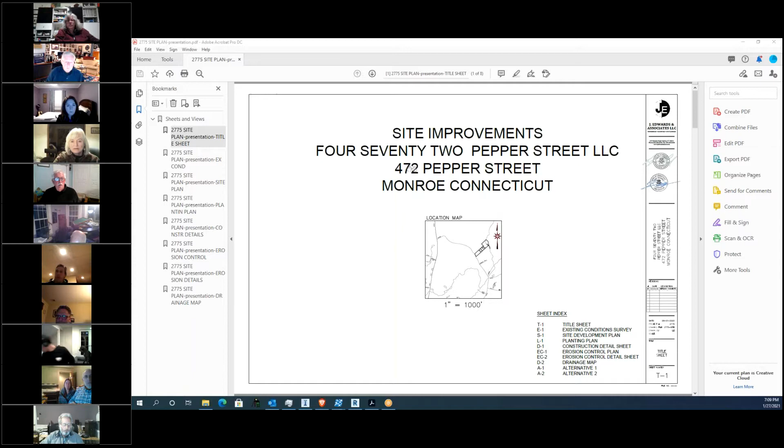Jason Edwards, is everyone able to see that? I can see it, okay. Jay, you want to go to the first sheet? There are the existing conditions. Can we get that bigger on there?

Okay, basically this site consists of an approximately 10.1 acre parcel. It presently has 3 buildings on the site. The 2 rear properties were built back in the early 70s, and the building closest to the road, which would be to the left of the drawing, was built sometime in the early 80s.

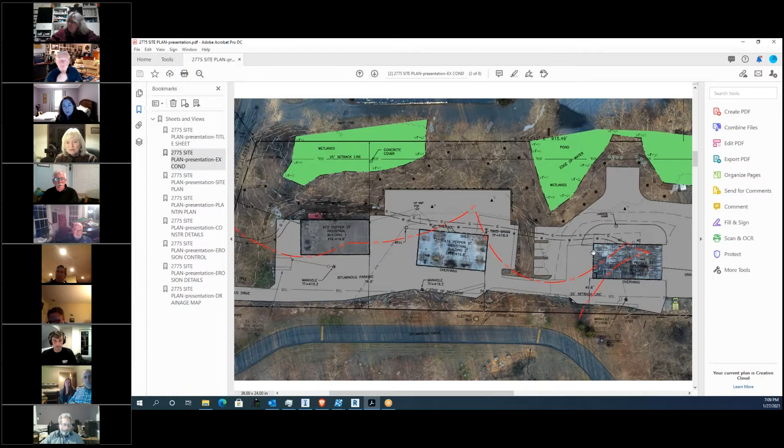What we are looking to do is expand the parking area so we can accommodate additional parking and expansion of the uses of the existing tenants in the building, primarily areas for truck and equipment parking, one being the building in the rear being a landscape contractor which would have small construction equipment, and areas for storage of materials, with other outside storage in storage containers.

We have basically gone through and prepared the plans. We've done soils testing to verify suitable areas for septic system expansion. Each of the buildings has an existing system.

And that's all been done under the supervision of the health department, and also with some testing to verify suitable areas for stormwater collection of the parking area.

Right now, the existing parking area is paved, but there is no central or controlled drainage for the site. Back in 1972 when they were built, they just basically sheet flowed it off to wherever it went.

With our expansion of the parking area, we are also going to construct 3 water quality basins, one basically for each of the 3 buildings.

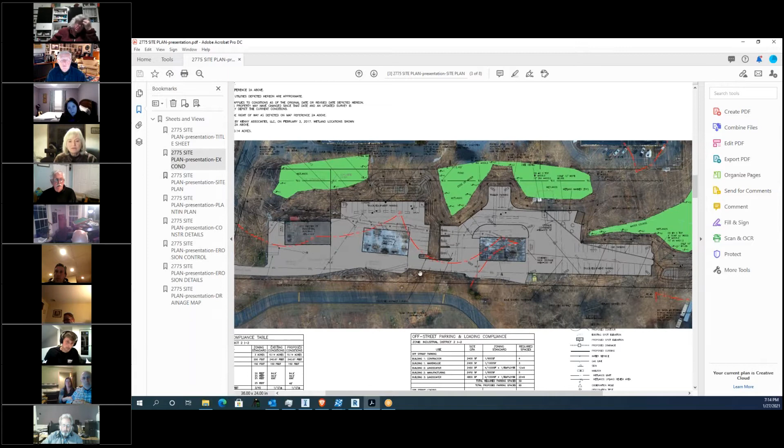There's basically three wetlands systems on the site. One which is immediately to the front of the property along Pepper Street, behind building number 1. And the other two, one being behind building number 3, is an existing wetland system. And the third one is to the rear of the property, and that discharges off to the north.

The activities, basically, we are indicating them in our application as activity number 1, which is associated with the first building, and that involves the construction of the rain garden. There won't be any alteration to the wetlands themselves. We will be doing work within a regulated area, but there will be no disturbance within the actual wetland limits.

Activity 1 will disturb approximately 2,480 square feet, for the construction of the rain garden. That will require approximately 85 yards of fill to construct that garden.

The second activity is the construction of the truck and trailer parking area to the rear of building number 2, and the construction of the stormwater basin, which is going to be associated with that.

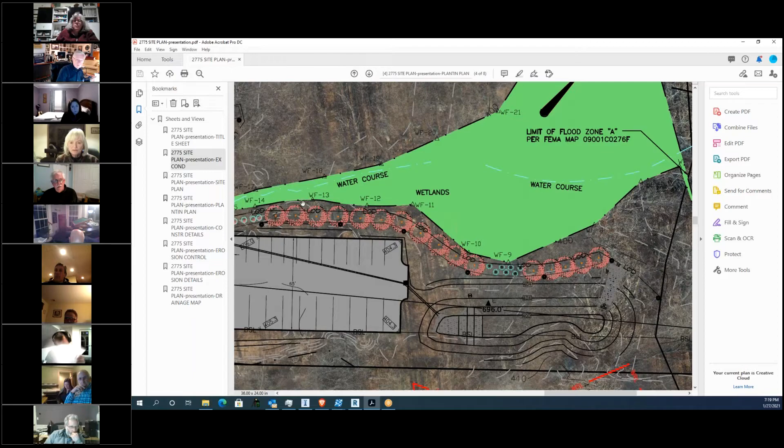We have provided some mitigation for the project to help alleviate some of the disturbance we're doing within the upland review area. This includes a planted buffer along all the edges where activity comes within close proximity of the wetlands, which is included in the design package provided to you. We are also proposing to install wetland markers along the edge of that buffer to delineate the limits of the wetlands and the restrictions established by the town for placing of those markers.

The third thing is a little more indirect, but I think is as much of a factor: right now all of the runoff from this site is untreated. We are providing an upgrade to the stormwater system and created a plan that will treat the runoff in accordance with the stormwater management manual. We feel that is a help in mitigation from the existing conditions on the site.

We have provided two alternatives to you that we prepared in coming to the issue we're now proposing. Get those up there, Jay. Everybody see alternative one? No, this isn't an alternative. Oh, I guess it is. Okay, I'm sorry, can you bring that up, Jay? I didn't realize I can't. Okay, now it makes sense.

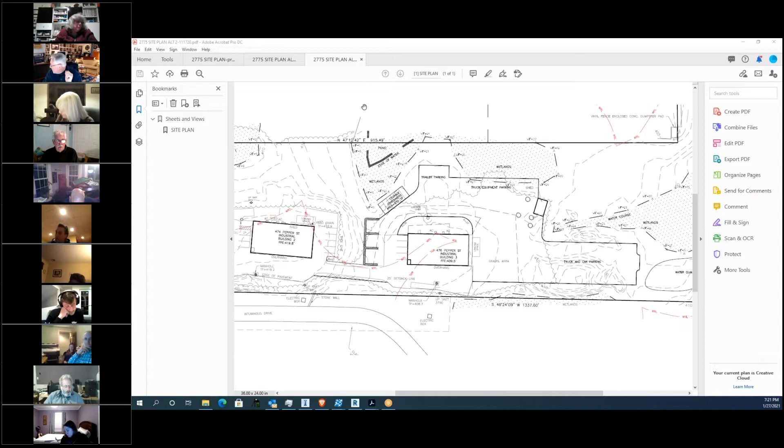Even though we do have a fair amount of activity within the regulated area, we've been able to construct and position the proposed improvements and expansion within the upland review area and maintain separation to the wetlands. With the mitigation of the buffer plantings we're proposing, this is by far the best of the alternatives. We feel this is a good plan for meeting the requirements of the owner and tenants on the site while still maintaining a reasonable separation to the wetlands and the best overall proposal for the site.

Again, the areas closest to the wetlands in most cases are the stormwater basins. Those will also provide a certain amount of protection because nobody's going to be able to go in there besides to maintain them. There'll be no reason for anybody to be back in those areas of the site. So that's basically my proposal and our proposal, and we'd be happy to take any questions from the commission.

Okay, start with Commissioner Spence. No, or wait till the end? Okay, start with Commissioner Gingras then. No questions. Commissioner Massaraco? No questions.

Commissioner Hall: Yes, how much additional asphalt will be put in place here? Can you give me an idea how many yards potentially?

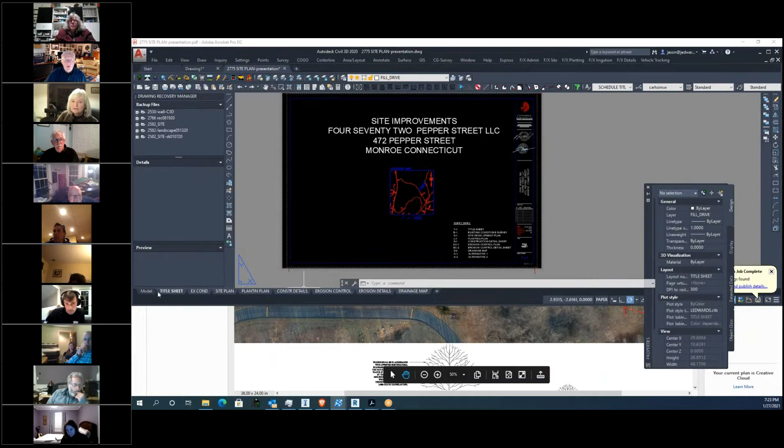Yeah, if you want to go on, I'll get that material for you as I'm talking. I've got to pull it up, it's right on this list here. Everybody gets the... sounds like somebody has that. Oh, do you want me to wait for that or should I go on? From my standpoint, why don't you go on? I'm just going to look it up and see what the difference is. Okay, just give me a minute.

You mentioned three different amounts of fill to be put in. Can you recap those quickly?

There's basically 3 areas of filling associated with this project. The first one is the stormwater quality basin located to the front of the building. That was approximately 85 yards, and that was basically constructing the berm for the basin.

The second activity, really the primary amount of total filling on this site, is for the expansion of that parking. It drops off to the rear of the existing building, and we have to bring that up to grade, which will require approximately 500 cubic yards of material to be brought in.

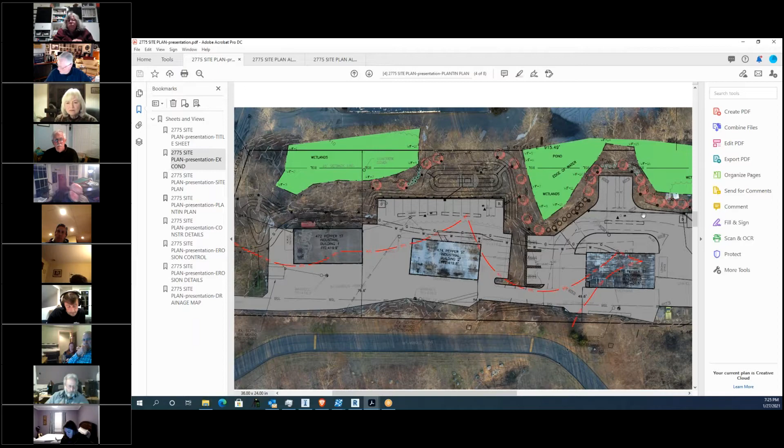The third area is associated with the construction of this parking area here. There's a little bit of filling required for the trailer parking in the back of the building, but the majority of the filling is to construct this new parking area to the northeast of the site, requiring approximately 925 yards. So those are the 3 areas, and that's going to be basically clean common fill, plus whatever gravel material is needed for the road base and pavement, all included in that number.

So it's going to be a mix of materials, but primarily common fill for grading out the parking areas.

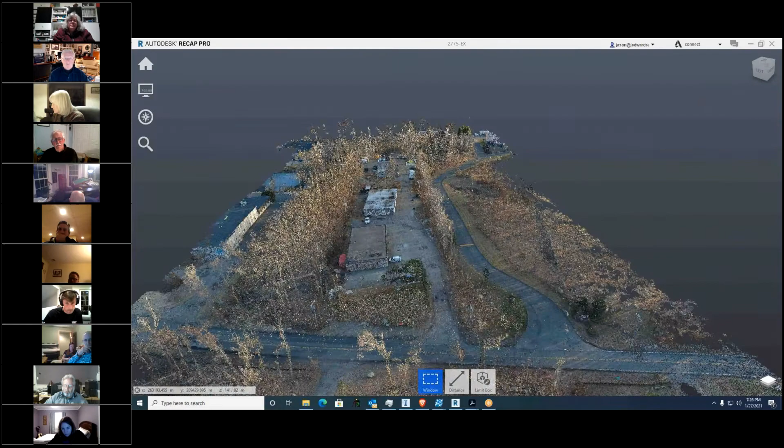Are you taking out any trees for that back section? Yeah, the water quality basin, or rain garden, isn't going to take anything, but the other areas we're expanding are all basically wooded. Here's an aerial view so you get an idea. We're in the back building, the third. Looking straight out behind those cars is where the larger parking lot for activity number 3 is going to go. There is a pile of fill that's there which we're going to use, and that's included in that 900 and some odd yards, but overall we will need 925 yards for that.

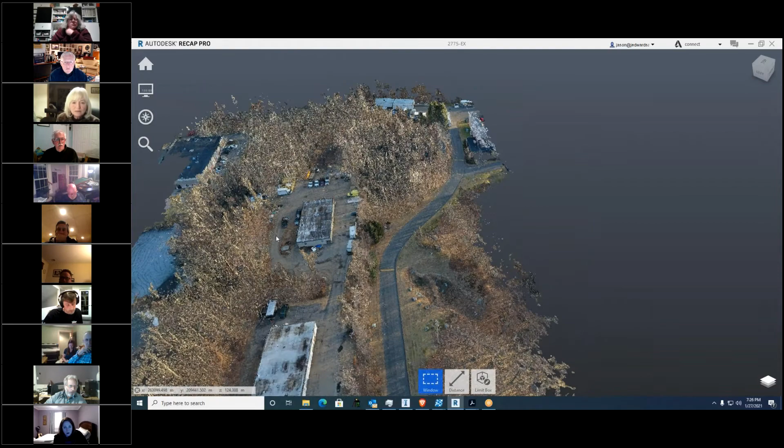The other area is again right behind building number 3, which is a wooded area, and likewise the back of building number 2 is a wooded area. So all 3 of them are going to be wooded, meaning there are going to be some trees removed as part of the construction.

Okay, and if I could get the asphalt yardage, that completes my questions. I'll get that for you in a second. Back to you, Chairman Romano.

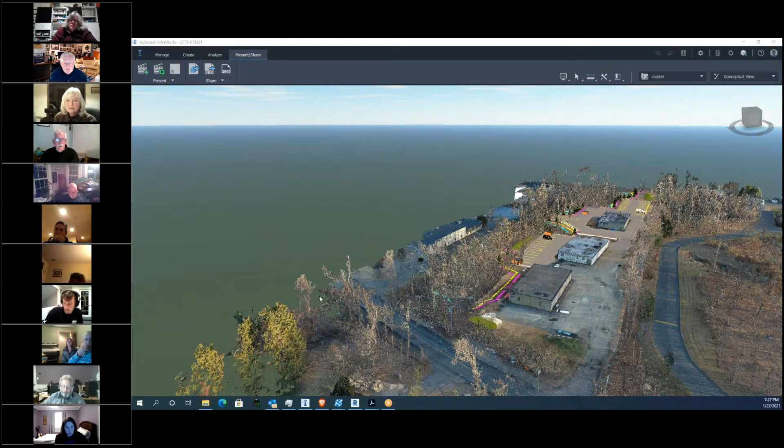Thank you, Commissioner Hall. Now, are the uses on this property going to change, or is it just to build on what's happening now? It's basically an expansion of the uses that are there now. John Kimball is also on, he may be able to explain a little more, but from what I'm gathering, the tenants that are in there now are the ones looking to expand.

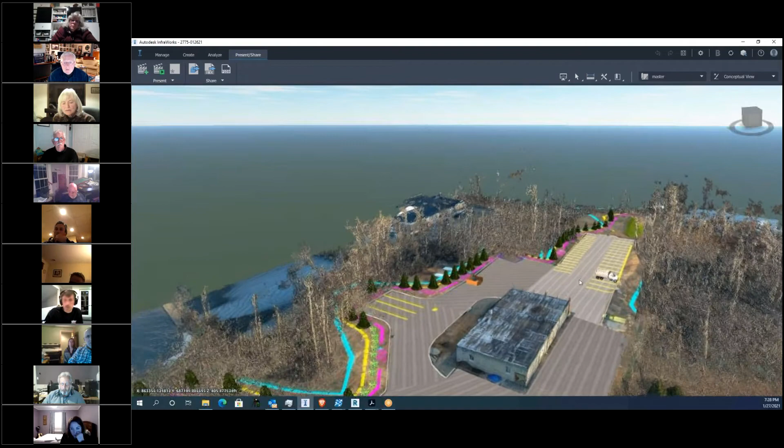Okay, and I'm trying to figure out how to phrase this question. Are there any other variances being asked for on this property for this project, or is it all just straight regulated stuff? It's basically regulated, all approved uses. The only thing we're doing, we have to go for a special exception or site plan, but we have to go before the zoning commission for approval.

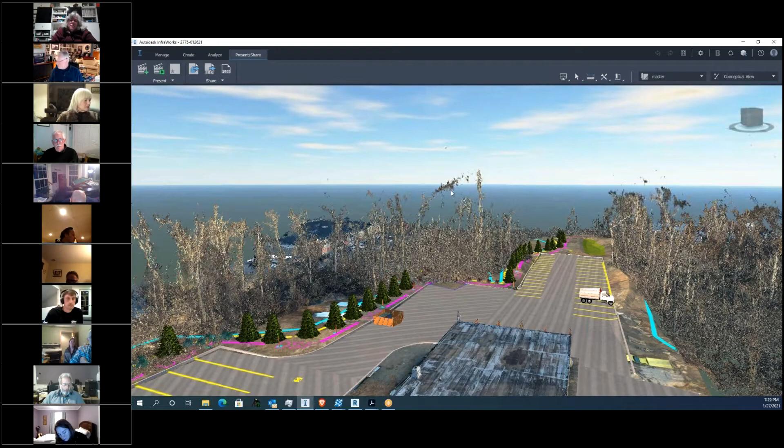The arborvitae on the plant list, why was that chosen? I wasn't the one that chose that, and I'm not going to claim to be an expert in that area, so we'll have to get back to you on that. It was a choice of one of the tenants in that building who prepared that landscape plan. That's his business, and he's the one who chose that.

And then the last thing, about the outside storage bins, what is the potential product that would be in there? It's going to be mulch chips, mulching materials, maybe sand and gravel—the typical things a landscaper uses when going to a site to install a pool or whatever. So it's not going to be a retail situation, it's for his own use.

I understand, I was just curious what was going to be stored in the bins, because I recall a similar application a couple years back in the same part of town where the storage bins had to be covered. I'm just wondering if that applies here too, but that wasn't from us, right? Does anybody remember?

Or was that the planning and zoning? Wasn't that salt or something they were going to be keeping? I'm talking about the indoor rock processing facility. I thought they had to be covered. But anyways, I was just curious to know if that was in play here. But that was it.

I would like to know why arborvitae. I'm not even sure if it's on the list, but if it is, it just seems like an awkward idea to me. But that's all my questions. Go back to Commissioner Spence.

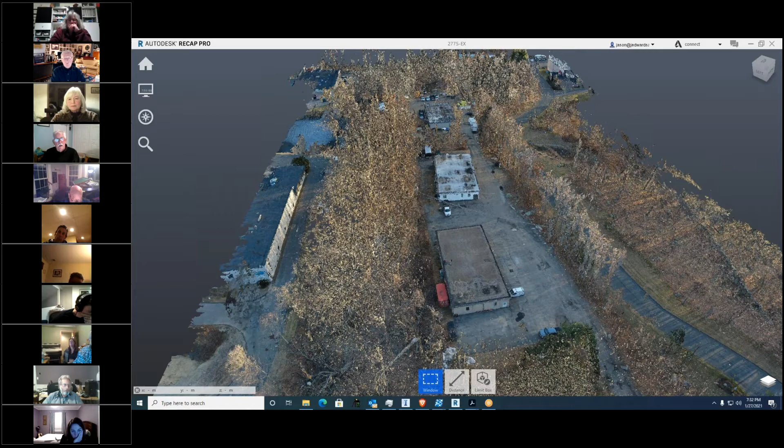Now, Mr. Edwards, I believe you said you didn't know what the source was from the piping, the culvert that goes underneath or behind building 3 and opens up into the intermittent waterway that starts, you don't know where that comes from? No, we honestly don't at this point. But if you look at the overall GIS maps, you'll see that there is a pocket of wetlands on this property here, to the south, and it's an isolated pocket of wetlands, and I'm not sure if that's possibly where it comes from. I don't know.

But it definitely has been there for a while, because if you go out there, there's rather large trees and everything else associated with it. That's just a place that looked like it would logically have come from at some time in the past. They piped it through there. I don't know, but there's no place we could find on our own site that there was a catch basin or any other source of drainage that would have resulted in and come out to that point.

Well, the culvert comes in from the west and flows to the east because there's a small head wall, so to speak, of large rocks that go around the culvert, holding it in place. So wouldn't you be concerned about hitting that if you didn't know where it was coming from? It seems to me construction might interfere with that somehow. I don't know, it just seemed to me that you should know where it is and where it's going before you start digging and moving earth around it and building on it. So that was just one comment that I had.

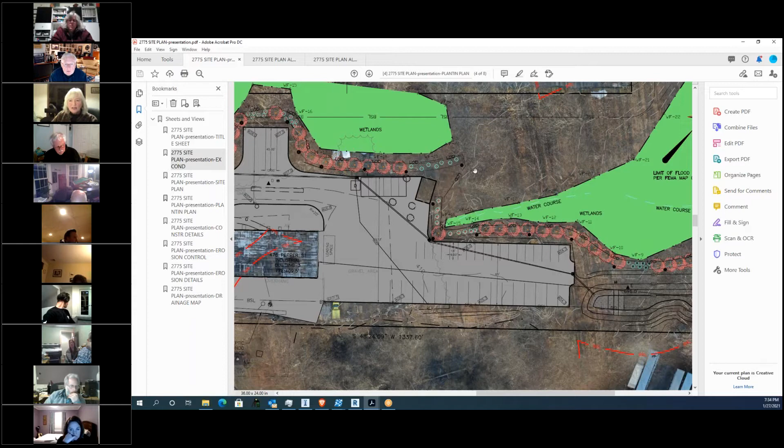And let me see. Oh, I really missed the bar scale on the plans, because our plans are not full size, and it's very hard to gauge how big a space is without having a bar scale. So I would appreciate seeing that on the plan. And I see that it's there. Never mind, I just found it. It was not what I was expecting it to be. So my apologies. Okay, let me see.

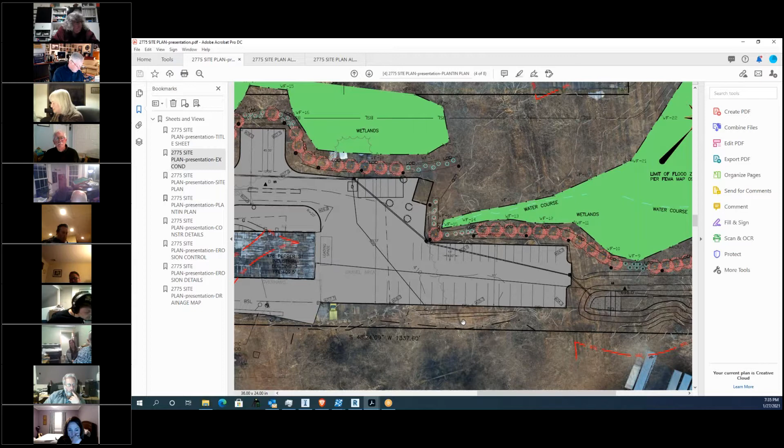Can you tell me what the slope is toward the bottom of the backs of all of the detention basins? It seems to have a very long slope, especially on the northern side. The northern side, they're both sloped at, most of the slopes we show here are at 2 to 1, which is the standard minimum. And there's nothing that's any steeper than that, because I guarantee the town engineer would have brought it up as a comment.

Understood. It just appeared to me that the last contour seemed to be considerably further away than the previous ones. And I was wondering if the LOD could be pulled away a little bit from the side of the wetlands, if that was as far away as it appeared. I'm concerned that you're so close to the wetlands in so many places that I can't see how it won't disturb it in some way or another.

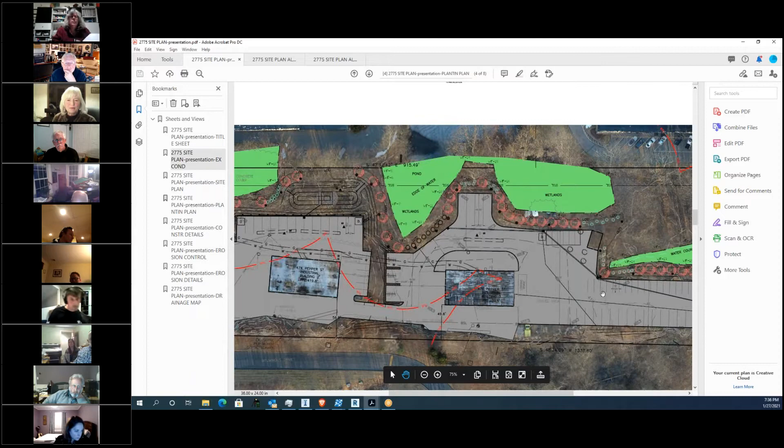Is there going to be any plan for an oil sand separator? You've got a ton of heavy machinery and other possibly polluting materials that are going to be funneled into the detention basins. But as was mentioned in Mr. Danger's report, this is a direct attachment to the Pequonnock River, which is right in the back and up to the side of the property. I was on the commission and committee for the PRI, and one of the things they were trying to discourage was too much development too close to the wetlands that directly contribute to the Pequonnock River. In this case, you're really accelerating development right next to that lead-in to those wetlands, and I'm a bit concerned about that.

Just tell me where I go. Oh, test pits. I see all kinds of test pit results, but I don't know where the test pits are. Can you show me where they are on the map? Because I could not find them.

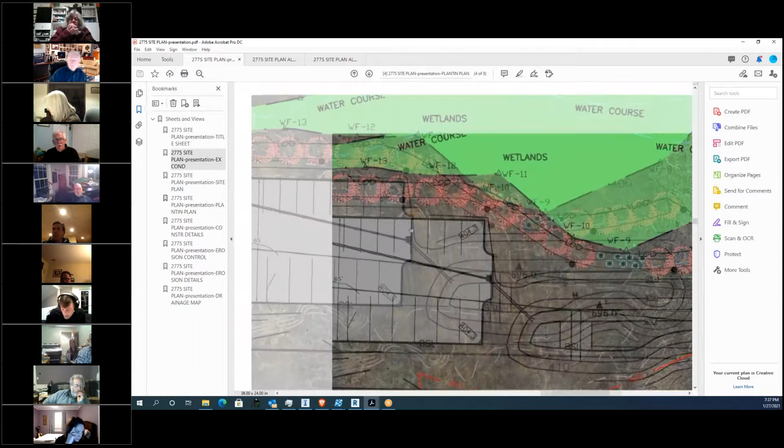He's showing you right there. You have two symbols: the triangle is your deep test, and the little circle colored in is the percolation test that was done. My little circle is about a micron. There's no way I could have found that.

Was there one done in the bottom of each of the detention basins? Yes. I take it back, I don't think there was one done for the rain garden in the front, because it's only a foot or two deep. But the major ones, basin number 2 and basin number 3, were both tested.

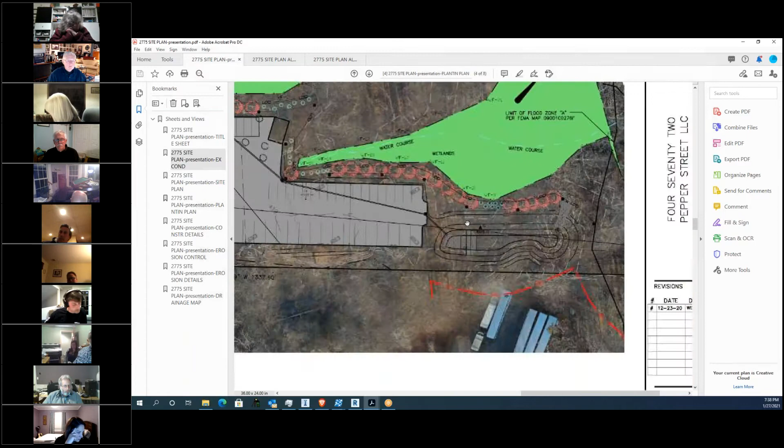In the bottom? Because I'm looking at sheet S1 and I'm not seeing any test pit in the bottom. I'm seeing it, I just said that. I said the first basin, which is the water quality basin to the front, we didn't do a test pit because it's only a matter of a foot or two deep. We didn't think it was necessary.

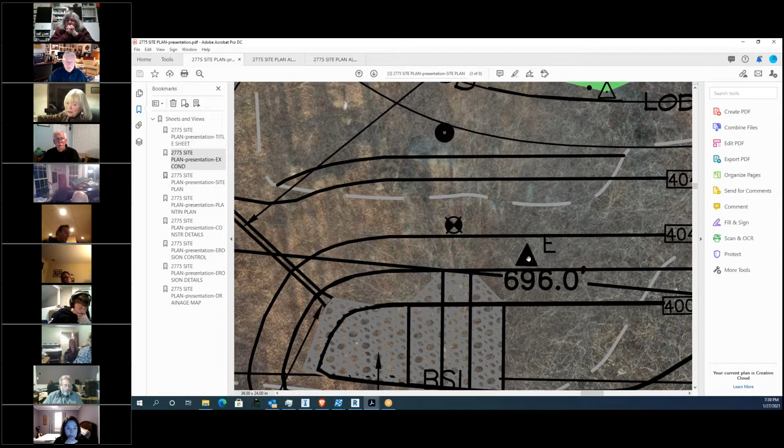No, I'm talking about the one on the far east side of the property. I do not see one in the bottom of that basin. Yeah, that's the one he just showed you, it's test hole number E. But that's 4 feet above the bottom. That's at elevation 404, 403, and the bottom of the basin's at 400. So that's a big difference. Yeah, the test pit's 8 feet deep. Okay.

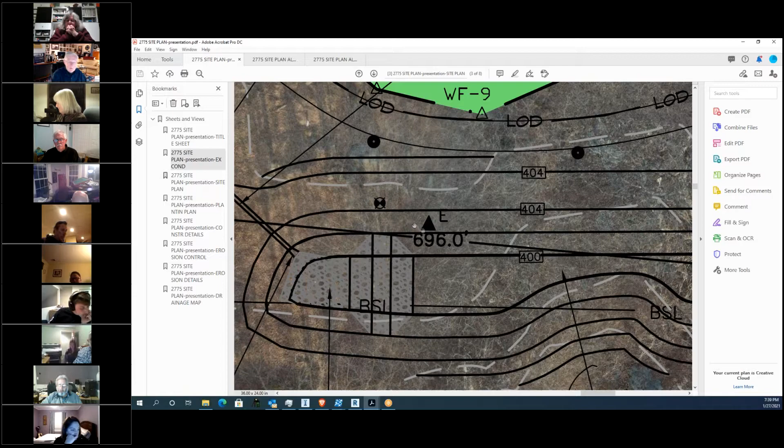All right, well, thank you. Now that I know where the test pits are, that does help a great deal. Okay, let's see.

On the rain garden, you have the limit of disturbance on the north side of the property. Where's the LOD on the south side? How far are you clearing to make that rain garden? You lost me there - it's just going to be a swale coming into the rain garden itself. We're not doing anything close to the wetlands. We put the limit of construction toward the wetland side.

Understood, that's not what I meant. On the north side, how many of the trees that are there now are going to remain? Is everything south of the red line going to remain, or is that going to be cleared? Oh, south, there's no reason for us to be over there, there will be nothing done over there. Okay, that's why I was asking for an LOD line there, so it's easy to discern where you're going to stop clearing.

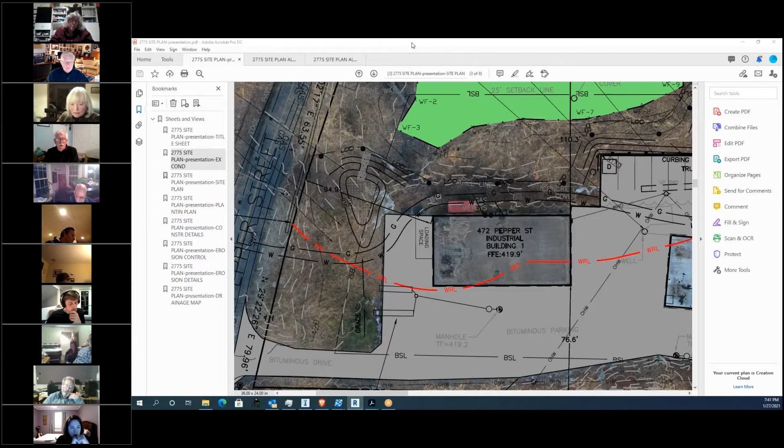Yeah, we can do that. We aren't intending on doing anything over there, it's kind of a lawn area now. It's not really lawn, it's a vegetated area and the water just runs off there now. We were just going to construct the basin where it shows, that's really all we had to do. But we can show that, that's not a problem.

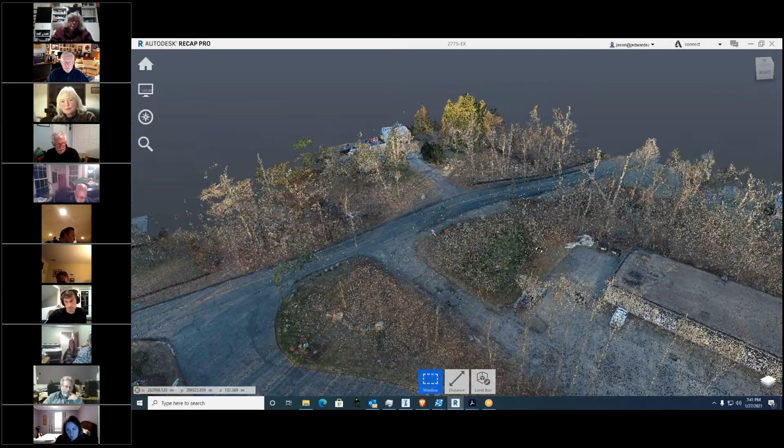Did you say there was or was not going to be any further water quality treatment besides the detention basins? We didn't, but I wrote down here, we'll look at putting some oil separators in there. I don't think that'll be a big problem. We can do it at the outlets to the two primary basins. The rain garden runs through a swale before it gets there, and there's not any really heavy activity taking place there. It's really to the rear of buildings 2 and 3 where the activity is.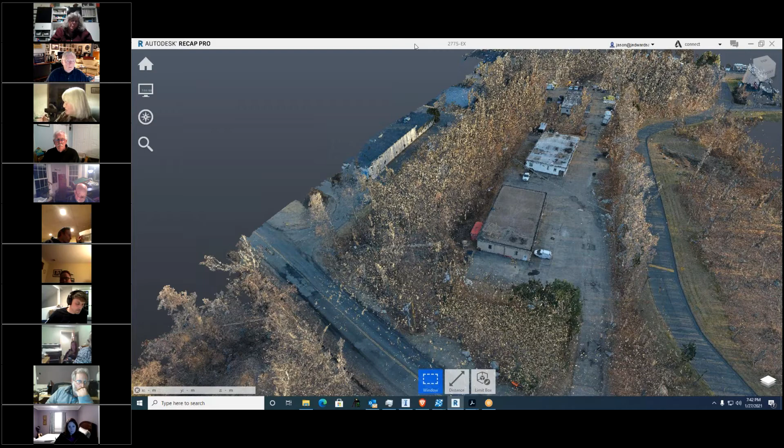Question - on the north side of the property, heading toward the eastern end, it almost looks like a road, a different contour. I'm going to point at it on my computer screen so you can see.

It looks like a road. It's the contour directly next to the LOD. It just looks like a road that goes through the back of the property, and it ends up at the LOD. And it ends very abruptly just beyond the shed.

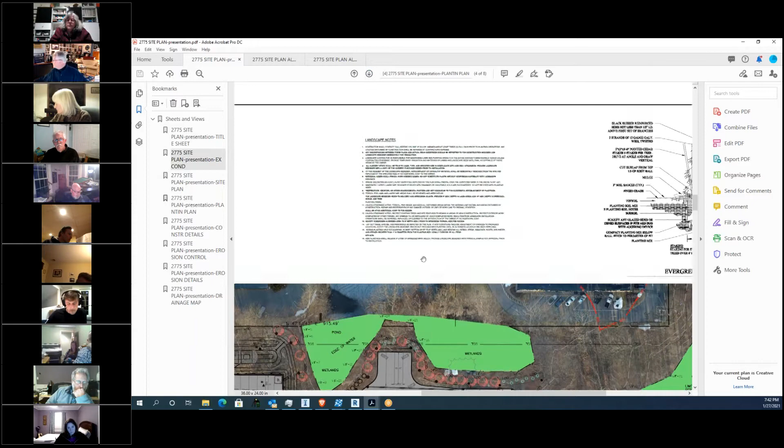What's that all about? You've got trees that go up to the end. That is just showing the planting area. We've shown that all the way along for the planting buffer. That's just the limits of the planting buffer area.

Okay, well, why is it being cleared if it's not needed for anything? Not up there, I'm talking specifically about the eastern side. We're not necessarily... That whole area looks like it's a 40-foot area, and it looks like it's being cleared, and I'm wondering why.

Oh, in other words, what you're saying is to bring the line back to where the shed is and come around. I think I understand what you mean. No, there isn't anything proposed there. That's just where we brought the line across. So we can revise that line. That would be good. As far as I'm concerned, the less that's disturbed that doesn't need to be disturbed, the better.

Is there going to be any salt storage on the property? Salt storage? Okay, I'm sorry, I didn't hear you. No, I don't believe there would be. I don't think so, but this isn't that type of operation. And I think if it was, then it would have to be covered. They would not allow that in an open bunker.

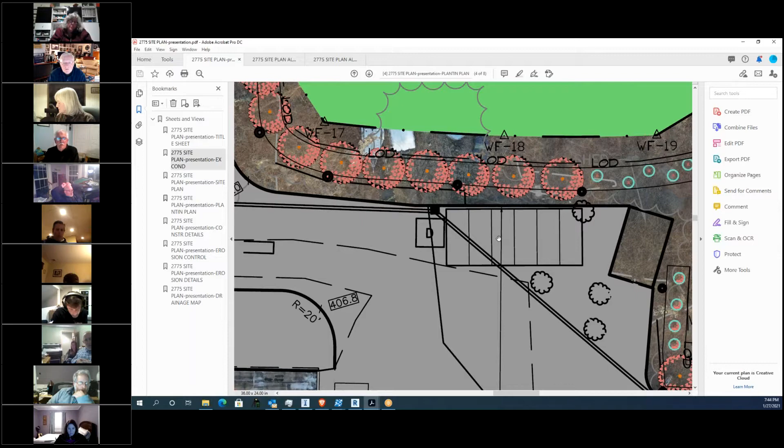Now there's a lot of containers and that kind of thing. Are they staying or are they leaving? We do show some containers being proposed along the backside of the parking area here. So we've got 1, 2, 3, 4, 5, 6 storage containers that he proposes to have in there. Now I don't know how many he has in there now, I don't think he has that many. But again, that's in a situation where we're trying to keep it inside, so it's not subject to the weather, so it's going to be much more environmentally attractive than leaving whatever it is outside.

Okay, the next one is the planting plan, my next comment. I'm not seeing a planting plan for the rain garden. Do you have one? The planting plan for the rain garden? You pulling that up, Jay?

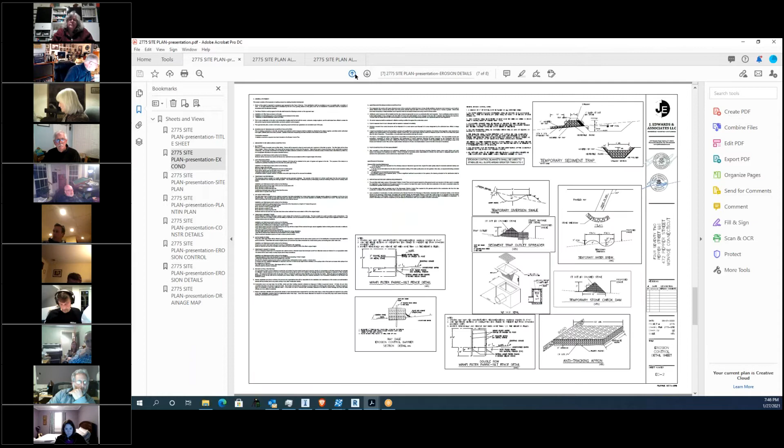I'm gathering there's nothing proposed for the rain garden. The planting plan is for the buffer area. It wasn't intended to be a planting plan for the basins themselves. We're proposing the buffer area, and that's what the planting we've shown is for that buffer area.

Okay, so we need one for the rain garden then, and whatever areas were disturbed that are not disturbed now should have some kind of planting plan attached to them. So I would like to see a more substantial buffer between, I'm going to call it detention basin 1, the one that's behind building number 2. There's only a few little plantings put in there, like 1 tree every 40 feet, and a couple little bushes here and there. And there's quantities, but there's no sizes of these bushes or plants, trees, whatever it is that you're planting.

Since there's a lot of upland review area being disturbed, I would like to see a conservation mix put in so that it can regrow to a decent buffer. So in general, it just needs to be really beefed up, I would think. It's not bad toward the back, although I agree with Keith, I kind of question the use of arborvitae, but if there's a good reason and we knew what it was, I guess we could deal with that.

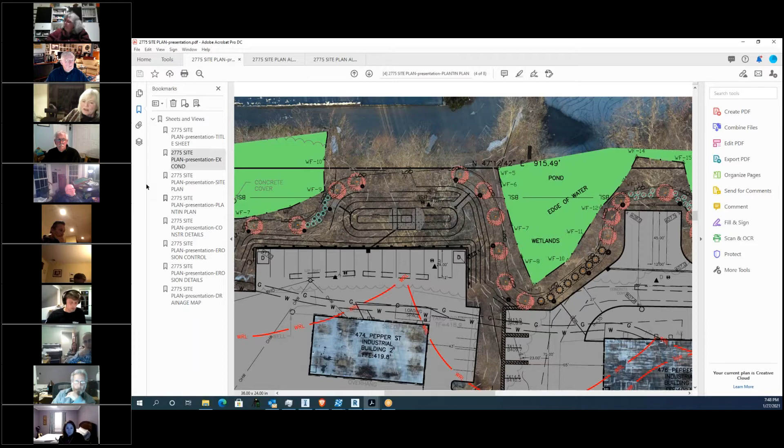And I think Mr. Danzer said there were some patches of Phragmites, and I was wondering if we could address them. Can you tell me where they are?

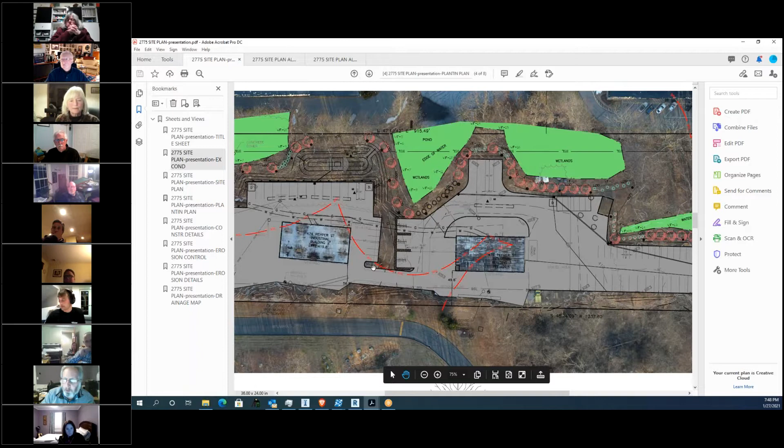My name is Steve Danzer. I'm a soil scientist, professional wetland scientist with an office in Stamford, Connecticut. I prepared an environmental review of this project where I characterized the wetlands. I believe the Phragmites are in the first pocket of wetlands in back of building 1. There's that kind of one quasi-isolated pocket of wetlands.

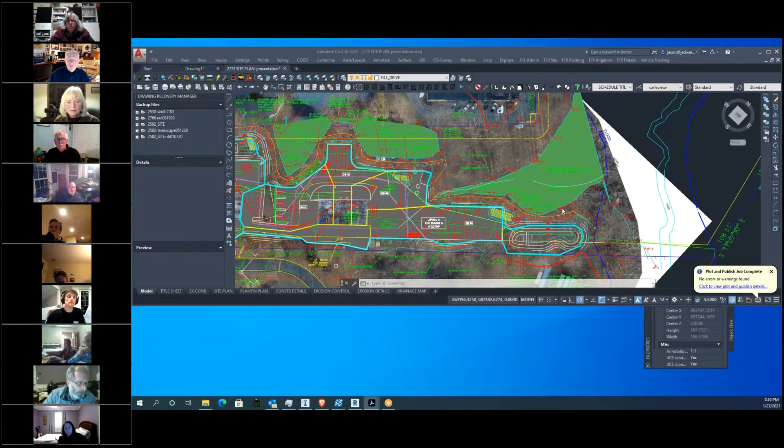Hold on, I guess Jason's getting the screen up. Yep, in that area, that's where the Phragmites are. It's mainly towards, if my memory serves me, the southern part of that area more so than the northern part.

Do you feel it is something that should and could be addressed? Well, I think the spirit of this application is to take a site that has been somewhat haphazardly developed in the past without provisions to remediate water quality, and in exchange for an expansion, put in some water quality controls. I think that will help a little bit.

But that area back there is not the highest quality area. It's a rather thin area, sandwiched in between the 472 Pepper Street Building 1 and the industrial commercial facility to the west.

It receives its source of hydrology threefold: there's an outlet pipe from the building to the west, there's runoff that comes down the slope from building 1, and there's runoff that comes in from the road, which I believe discharges through a pipe. So that wetland is basically fed by stormwater of dubious quality.

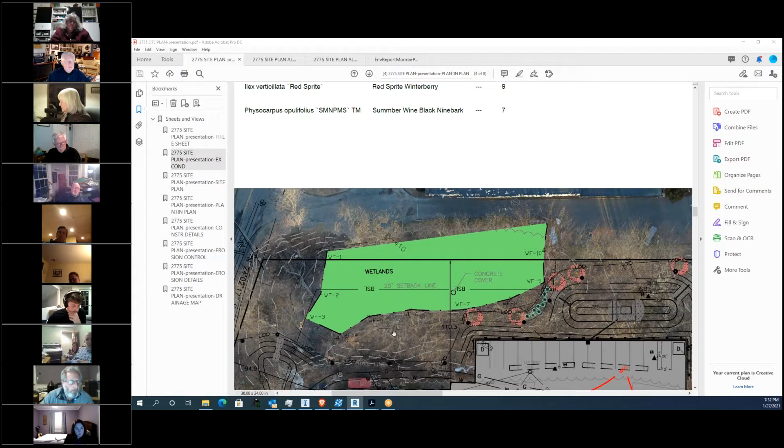On the E&S plans. Back to you, Mr. Edwards. Do you know when all that fill was brought into the back corner where you're proposing the new parking lot, toward the river?

Supposedly what I was told was the original builder of these back in the 70s put that material in, and it's been there since the 70s or maybe into the early 80s. It can't be - it's got nothing growing on it, nothing. This has to be fairly new fill, and I was wondering when it was placed there and why.

Did anybody investigate the area underneath it to see? It appears to me that wetlands were filled there, and it wasn't necessarily that long ago. Filling a wetland is not exactly what we're supposed to be doing without approval.

I just wanted to put that out there. I also wanted to make sure - actually I'll let it go there, but I would like to hear Denise's and Scott's comments to make sure that they are addressed. All right, well said, thank you Commissioner Spence.

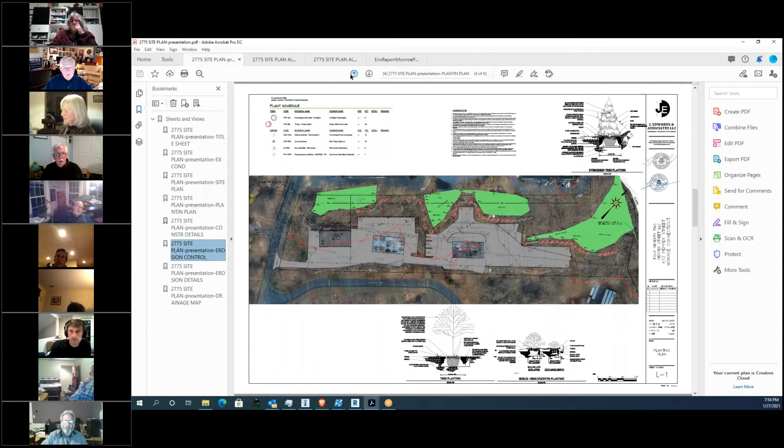I have a couple more questions for you, Mr. Edwards. There's not an existing gas service on the property now? There is not gas service now, no.

Oh, because I see - excuse me, this thing, it's a gas... Chairman, it's John Kimball for the record. There is gas service to the first building. Oh, okay, sorry. And buildings 2 and 3 do not have gas service. The other, while I'm speaking Mr. Chairman, if you could ask Commissioner Spence to clarify the area she's talking about, because I'm very confused, since there's been no wetland filling on the property.

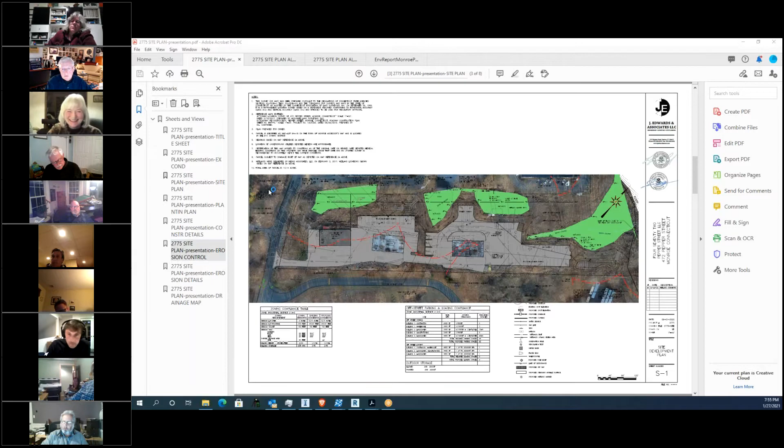So if she could point, I don't know how she could point, but if somehow we could figure out what area we're talking about, so we have a better understanding of where her concern lies. Okay, we'll get back to her. I want to finish my questions first.

Thank you. John, probably better to ask this to you. I see there's overhead wires and some poles. Are you going to go underground with the utilities as well, the electric and anything else? Because you've got a telephone pole in the middle of the parking spot. We're not planning on going underground with the wires at this time. It'd be cost prohibitive. We're addressing the things that we can address, but that would entail bringing in transformers and all new services to all the buildings, and it's just cost prohibitive.

I understand. Okay. And then also over here on the east side behind building 1, there's 2 things that say concrete covers. What are those? Behind building 1, there was an old hand dug well. I think that's if it's kind of towards the wetland back there. Yeah, there's one in the wetlands and then one right off your proposed pavement, by the dumpster.

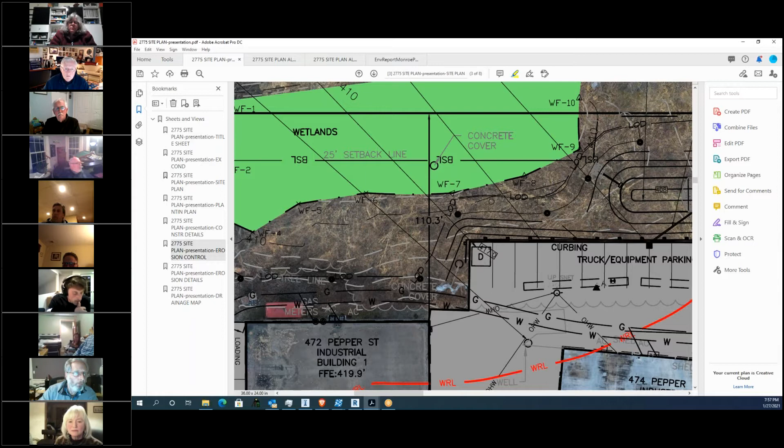By the dumpster. Right there. Well, I can't... You're almost there. Right there. That. Oh, concrete cover. I see that. So then wetlands, that's an old... Those are old hand dug wells. Okay, they both are. Yeah. Oh, and they're not being used. Okay, I think that's all my questions then.

Lois, if you want to chime back in. Chairman Romano? Yes, Commissioner Hall here. I have another question. Sure. My question is to Mr. Edwards, regarding, early in your presentation, you mentioned that there was no stormwater quality system in place today.

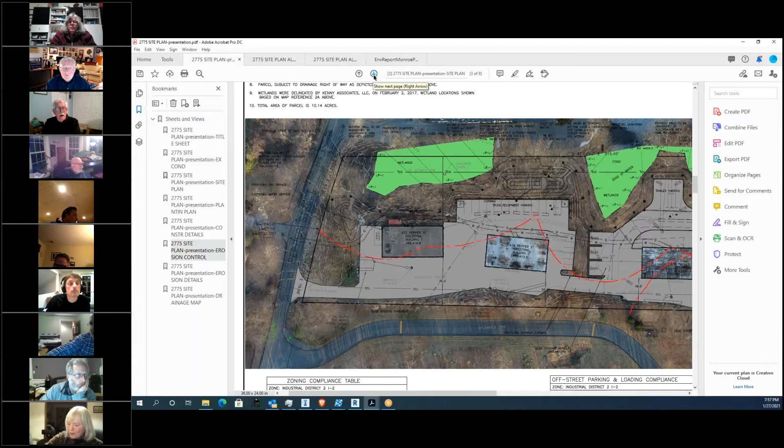You mean no retention basins? Could you expand on that a little bit, what's there today as opposed to what we're seeing in the picture? Basically, right now, Jake, you can go to the existing conditions map. Okay, this is basically what the conditions are there right now. Right now, all of the runoff just strictly runs off at the low point of the parking areas.

And just goes overland to wherever the wetland source is. So the back of this building just sheet flows off and goes to both of those wetlands, and likewise the back of building number 3 goes off, and this is kind of a low point over here, so it goes into the wetlands there, and it goes off to the east or the north, into that, where that pipe is. So, as I said, there's no curbing on any of the parking area, and runoff just goes where it goes.

Okay, so no controls today. So the addition of the retention basins is a major step forward. That's correct. Now, to answer your question earlier, presently there is approximately 1.6 acres of impervious area, and we'll be increasing that by 0.6 acres to 2.2. So those are the numbers that you were looking for. Okay, yes, thank you very much. And that was the only question I had.

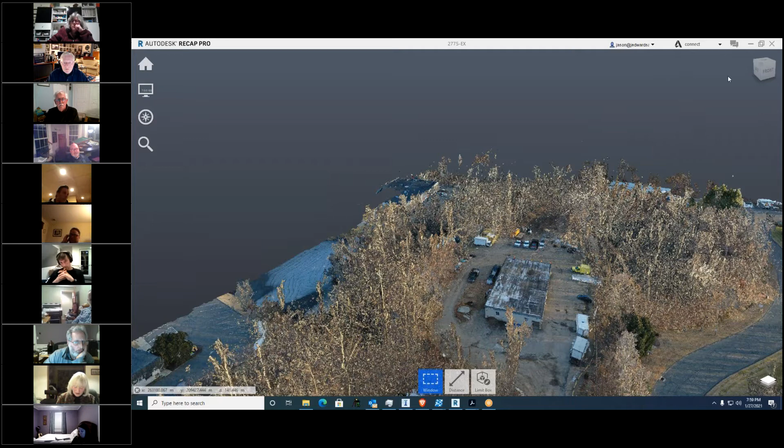Okay, back to Romano. Thank you, Commissioner Hall. Commissioner Spence, you want to pinpoint to the applicant where you thought you saw wetlands disturbed? Sure. If you go into the existing conditions survey, page E1, as you head out from building number 3, you can see by the contours that there's quite a hill, which appears to me to have been all fill. And I noticed that there's a large rock in the back, and I assume that you're going around that outcropping for the detention basin. But that had nothing to do with the fill. Those are the two large hilly areas that I noticed, and that just seems out of place. With nothing growing on it, it just looked like it was fill.

May I address that? It's John Kimball for the record. Yes. So Joe Marcelio was the previous owner. They owned a septic company. He and his brothers built these buildings back in the 70s, one building at a time. They'd get home from work and start working on a building. And as we know, back in the 70s, we didn't have wetlands commissions or regulations. It's my belief, and I can't know for certain, that as they did projects or built the buildings, that's where the spoils from the buildings ended up. The current tenants' landscaper weed whacked that area because it was just overgrown with weeds and thorn bushes and things like that.

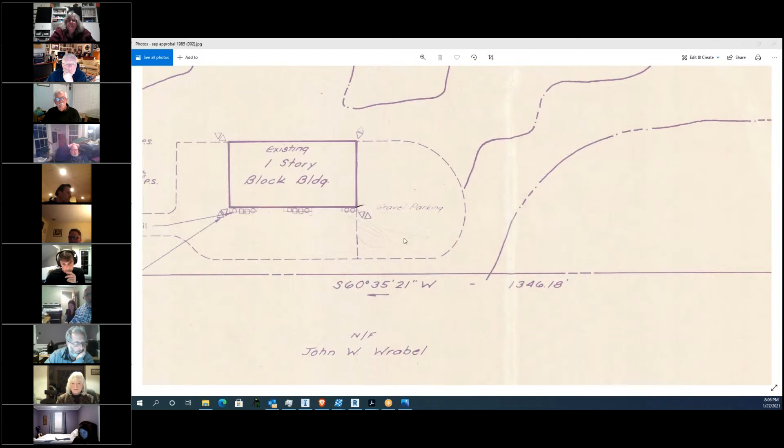John Kimball for the record. Yeah, that little half circle behind building 3 is actually a gravel parking area. Yes. So when you say there's no gravel that was allowed, but behind the building, John, north of it. Okay, all right, north of it.

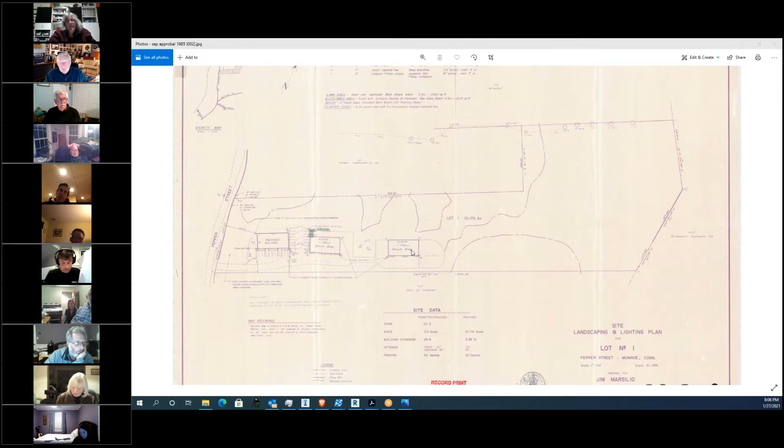The other thing is, right now, well, two things. One, in 1985, a map that was approved, that was not based on a wetlands delineation by a soil scientist. That was based on USDA aerial survey maps taken from, you know, 10,000 feet. Those are not to be relied on, even today nobody relies on those. They're used as a guidepost, as I'm aware, of where wetland soils may be, but there's no clear indication that there's wetland soils there.

But more importantly, what we're trying to do is basically get something approved. We're actually under contract to sell this property, and we're trying to get the property on a solid footing so that when the new owner takes possession, he'll have a clear path to implement and come into compliance with wetland regulations, adding the stormwater controls, basins, and things of that nature, so the new owner has a set of rules and guidelines to live by.

So I think our goal here is, instead of the entire site sheet flowing into the Pequonnock River right now - any oils, water, salts, anything put on that parking lot just goes willy-nilly right into the Pequonnock River - by adding the detention basins, rain gardens, stormwater quality measures, sand oil separators, and planting areas, we're not only improving the wetland quality for the future, but also putting up delineation between the active use on the property and the wetland areas by installing planting areas.

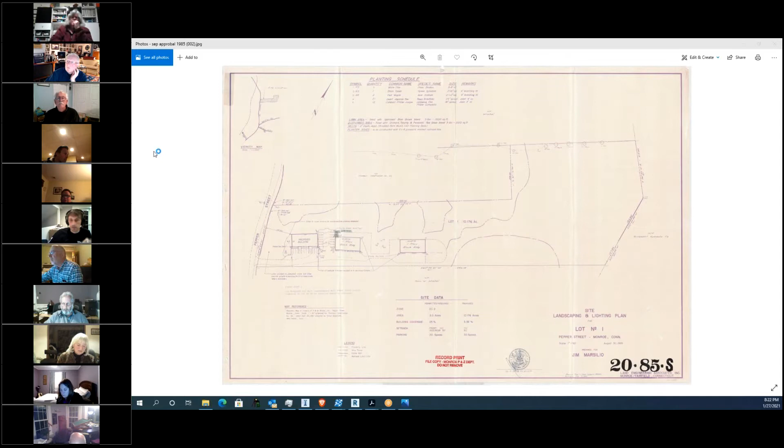I didn't really pay too close attention to the quality or the grading of the existing wetlands on the site. But if you had, say, 4,000 and it's kind of not so great, something much smaller but in a higher quality may just work out and put this to rest. Because I did mention that, I want to see how the other commissioners feel about that.

Go ahead, Commissioner Hall. I think it's a good idea to look at that, Commissioner Romano, to simplify this and keep it moving through the process. We could lose a lot of time with investigation, but what's there today is well known. So I would agree with you on that option. Yeah, it's an option.

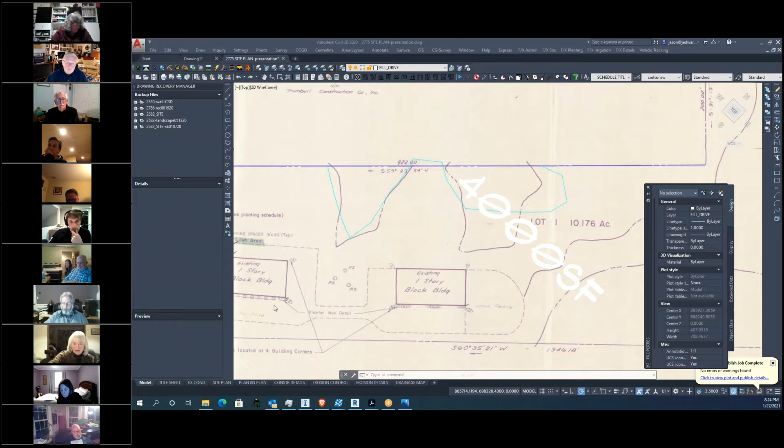Commissioner Spence, thoughts? It doesn't sound like a bad idea to me. There seems to be an area to the north of the piped water course, one that ends all the way down where the piped water course begins. There's wetlands to the north and there's that wetlands to the east. Perhaps in that section, although I hate to disturb anything that's not disturbed now.

It's functioning well the way it is, in a good way, if it's undisturbed. But if it's being disturbed by encroaching dumpsters or trucks and that kind of stuff, I don't know how clear that area is, but maybe that's a good place to investigate. I don't think it's going to move things along rapidly, though, because creating a wetlands isn't something you just snap your fingers and it's done. So if that's what you're thinking of, I'm not sure how well that would work.

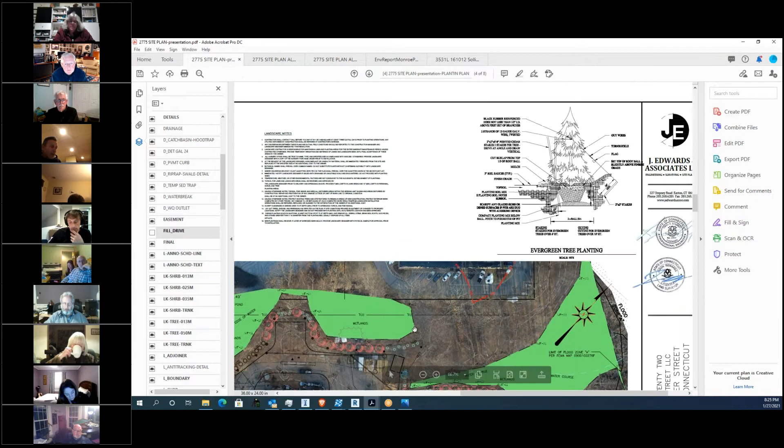All right, anybody else want to chime in, Ross or Clark? Let's see, the south side of the parking lot - there's no plantings between the parking lot edge and the wetlands. On one side you've got the arborvitae planted, which would keep vehicles from driving off the edge since there's no curbs. But the other side of the parking lot has no plantings at all. What's going to keep vehicles from going a little further in for parking reasons?

Well, there are curbs on - this is all curbed now, so there will be curbs on all the parking areas. Also, one of the requests from the town engineer in the stuff we just received was that he wants to see some sort of guardrail along some of these areas with steep slopes, for safety. So you're going to have a minimum of curbs and guardrails in some areas.

All right, so I guess the next time you present a plan it'll show the curbs, plant sizes also aren't on here, and the guardrails. Well, the guardrails we just found out about this afternoon - the town engineer's comments just came back. The curbs have always been proposed in the plans. That's actually a requirement of your zoning department anyway, that the parking lots be curbed.

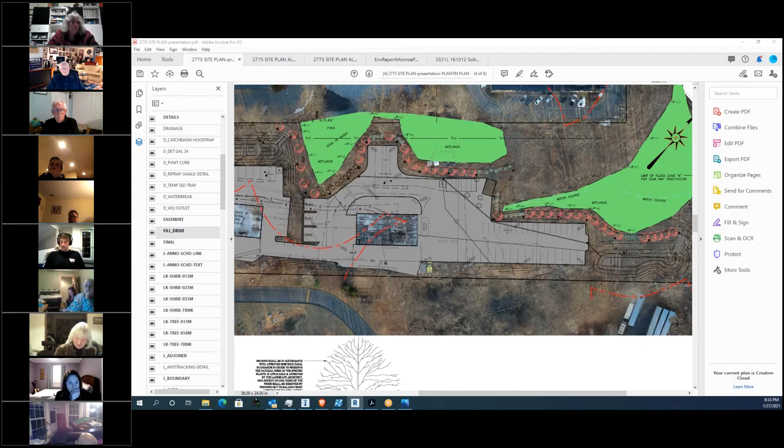Appreciate it. All right, so we're ready to move on to the next item. We'll continue this application at the next meeting.

All right, so I think are we on enforcement? Yes. I guess, let me see if I could bring it up. And I believe, at least I thought I saw the person on. This is number 7.

It's NOV discussion, IWC 2020-12, 118 Elm Street, unapproved clearing beyond posted upland review area. And I believe I saw Mike Daniels, if it's one and the same. So let me see if I could get this up. Don, can I make myself presenter? I guess so. I believe you can, Denise. Okay, bear with me while I try to get the jump drive to open up for me.

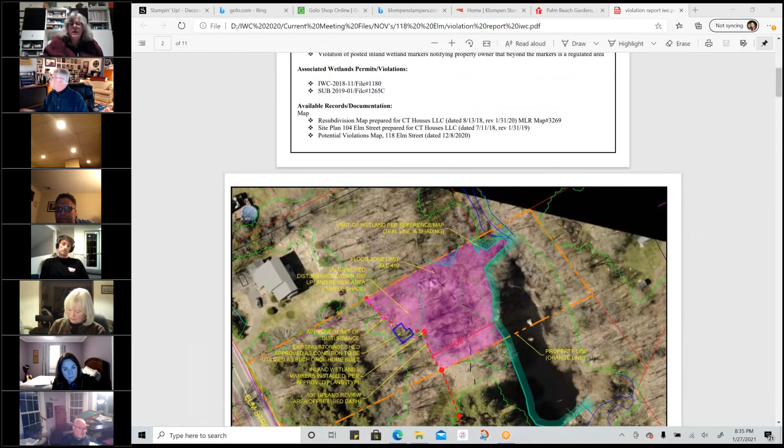So basically, staff had gone out to do a review of 104 Elm Street, which was a three parcel lot. It has been subdivided, and staff from one of our other departments had gone out to do an inspection of S&E controls and came back to inform me that at 118, there had been some unapproved clearing within the 100-foot upland review area. There's unapproved storage of firewood within the upland review area. It appears that there was disturbance beyond the limit of approval, and that the property owner went beyond the markers that we have saying this is a regulated area and did some work in there. So this property right here is 118.

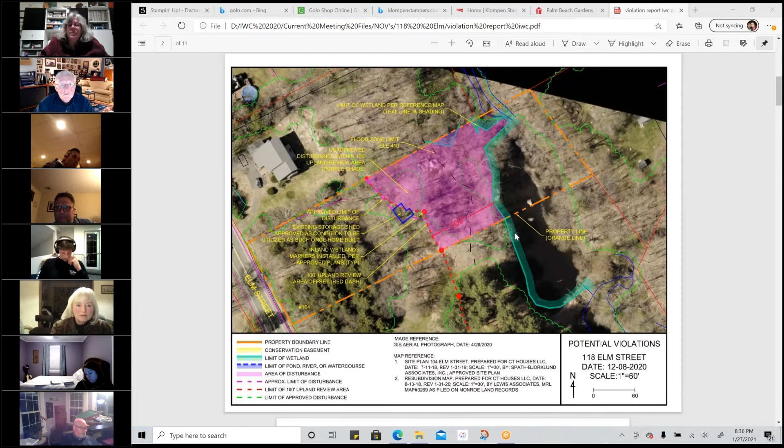There is no house on this yet, it's a buildable lot. There was an existing storage shed that was approved by planning and zoning to be utilized as such once a home is built. Looks like it might be being used. The photos I think will help a little bit - this is a gravel driveway that has been put in that goes back towards that shed. You'll see the shed, and all this wood.

You can see piles of the wood, and there's the lake back there, or part of the river. Here's some more piles of wood. And I'm trying to get to, this is the shed that looks like it's being utilized right now. Someone's been having good parties.

But here's our marker, which I'm trying to get very clearly. Here's the post with our marker, and you could see that activities well beyond it have occurred. So an NOV was sent out to the property owner, and I believe he's here to maybe answer the commission's questions.

Okay, that's Mr. Can't see the names anymore. Yeah, I know, you want me to unshare? We all have this packet with the pictures, right? You should, yeah, I'm looking at it right now, so I think we could take that off. Okay, bear with me, I got to figure out how to do this now.

People can see your... how do I unshare this? Well, in the meantime, Mr. Dan, if you want to stop sharing your screen, Denise, at the bottom you'll see a picture of the screen. Yeah, no, this is where I've got the 3 separate things again, Donna. Go up to your view, stop sharing. I just hit stop sharing, it should have. Is everybody back? I still have it on my screen. Yeah, I still have it. Oh boy, so when we lost you, you can work on, let's have Mr. Daniels start. Go ahead, I guess, while I try to figure it out, before we share my screen.

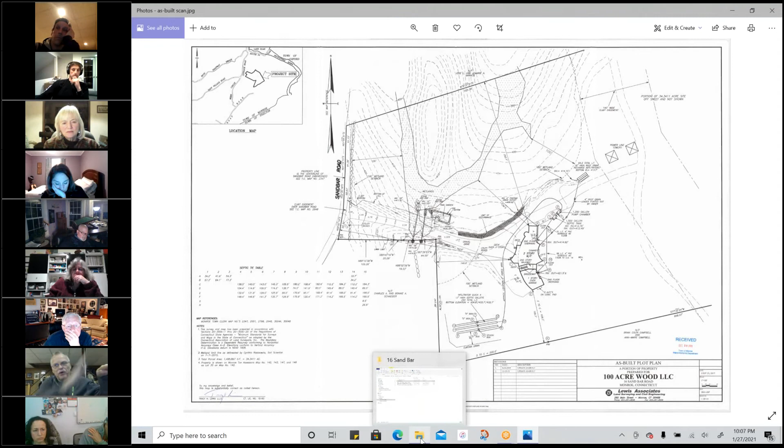So the two ends stayed the same, and instead of going all the way down and coming up, they didn't quite go down as far. So the proposed driveway grade coming in off of Sandbar was originally a 10% grade, and the as-built shows somewhere between 7 and 8%. That grade flattened out. The driveway is still, one of the conditions of the wetlands approval was a paved driveway that is still going to be installed and is required under the driveway ordinance due to the grade of the driveway.

No, that's not. We had some pictures. I thought maybe some pictures might help, but I'm trying to find the right one for what you guys are talking about. So this is actually, I'm not far enough up, am I yet?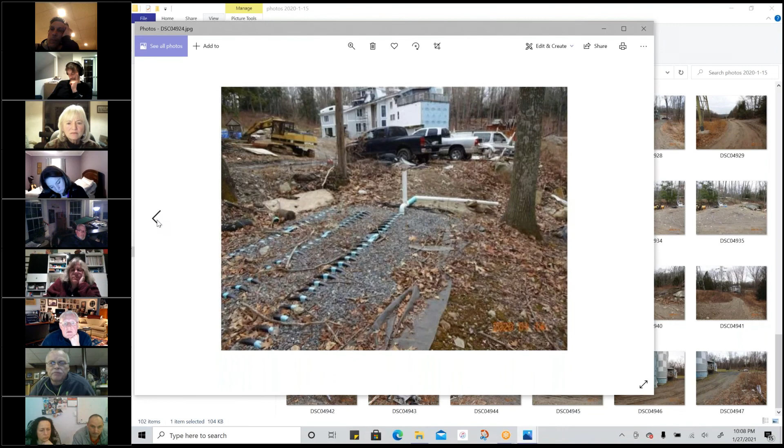That's all in the back. Yeah, that's the wrong direction. There was a question about that pond, that wetland area, that pond that you had just scrolled past.

And that is pretty much central to the property. We plotted that out, the approximate location, on the original site development plan, and there are no wetlands within a couple of 100 feet of that location. So that was, I want to say, a farm pond.

This kind of helps show a little bit of what you're talking about. That's why I knew there was a photo that had been taken to give you that idea, so you could see where he's talking. If that's the front, that's the street coming down and then back up again, right? And then back up again, because this is where the house is. Okay.

My other question is, this driveway, does it access the easement to the power line? It kind of looks like that on that plan.

Anthony, no, I don't believe they use that, but Anthony would be the better one to explain that. If you're talking about the power company, they have their own access further down Sandbar Road. Yeah, on the plan though, it looks like your driveway spins off across the house and follows down to the easement, like a nice path on the plan. So yeah, for us, yes, and yes, that's the way it was originally.

Look at the original driveway coming onto the unimproved property. There was a pathway that went all the way back up to the power line. So that's no longer going to be their access? No, the power company has their own access further down Sandbar Road.